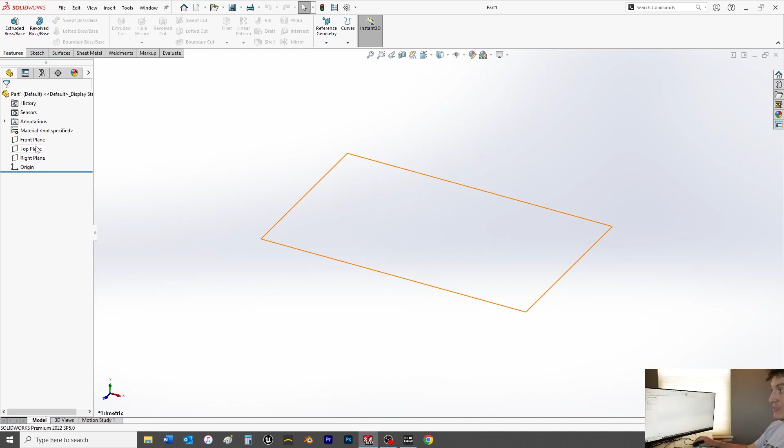So over here on the left side, you'll notice there's front, top, and right plane. Again, pick your poison. I'm going to choose the front plane. I love to make parts on the front plane whenever possible. Again, you will have a personal preference of where you'd like to start, front, top, right. You'll notice that once you make a part, it makes a specific orientation to the part.

However, when you're doing assemblies, it may be important or be driven that you pick a specific plane that you make the 2D sketch for that part. Later in tutorials, you will see where that applies. But for this one, it's your preference. Have fun. I'm going to choose the front plane.

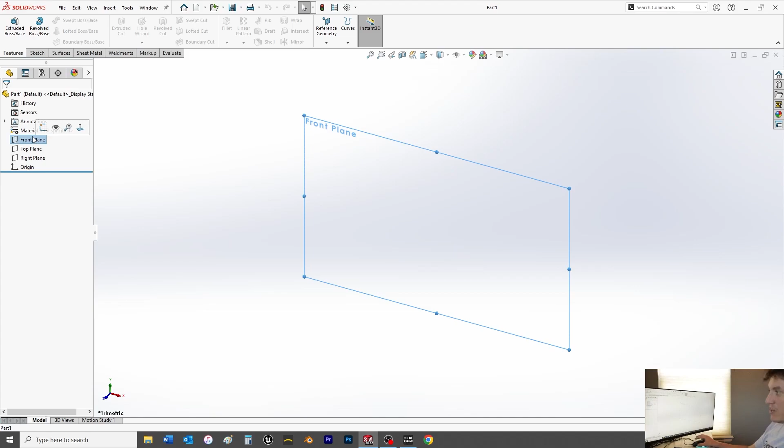I'm going to click the space bar. It opens up this little orientation dialog box. And this awesome little button here, Normal To, is what I'm going to choose. You could also hit Control 8, the hotkey for it. And that's going to bring my front plane Normal To view.

You're going to find Control 8 or Normal To, that hotkey is something you're going to want to work with a lot in many different situations. It's going to simplify things for you. Once things get all wonky and upside down and you've lost your way, hit Control 8 to bring things back to Normal To, and then you can tweak it as you need.

So from here, up here in the top left, we're going to go to the Sketch tab, and then we're going to click Sketch. Now from here, I'm going to choose a center rectangle. You'll notice there's a little drop down arrow to the right, which gives you a couple of different options, but for this tutorial, we're going to stick with a center rectangle.

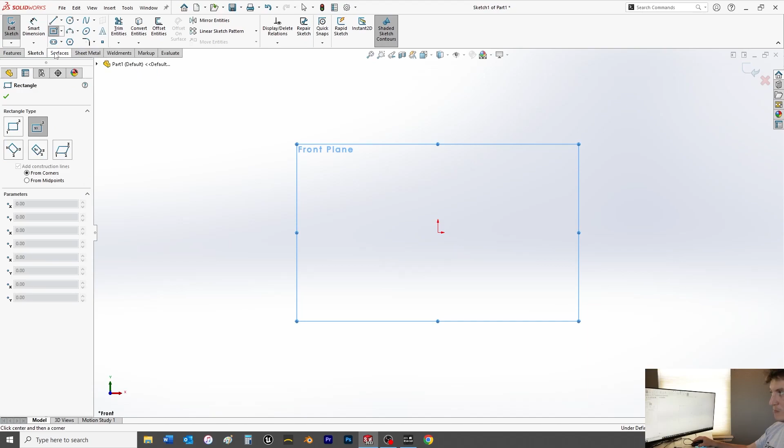Now, oh no, not quite a Bob Ross, but I do have myself a number 2 pencil icon there. I'm sure if you squint real hard, you'll see a number 2 on that pencil somewhere.

Anyways, you will in fact see the icon of that little center rectangle that we chose from up here on this button right below the number 2 pencil. So I'm going to bring my number 2 pencil and point on this point here known as the origin. When hovering over it, I haven't clicked anything yet, you'll also notice this little yellow box popped up, which is a relations icon. Further, the icon within this box is the coincident icon.

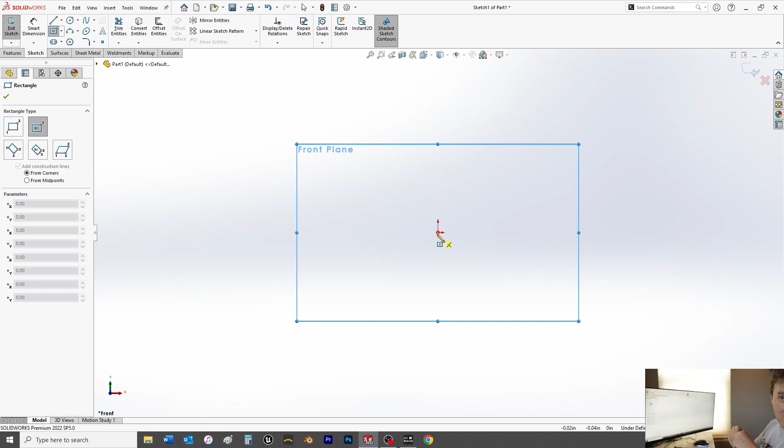I'm definitely going to go over relations in depth more in future tutorials, because relations and dimensions are super important to fully defining a sketch. And I can't think of a reason why you would ever want to leave anything in a sketch undefined, unless you have infinite reference lines, construction lines, which we'll get into in later tutorials, what that even means.

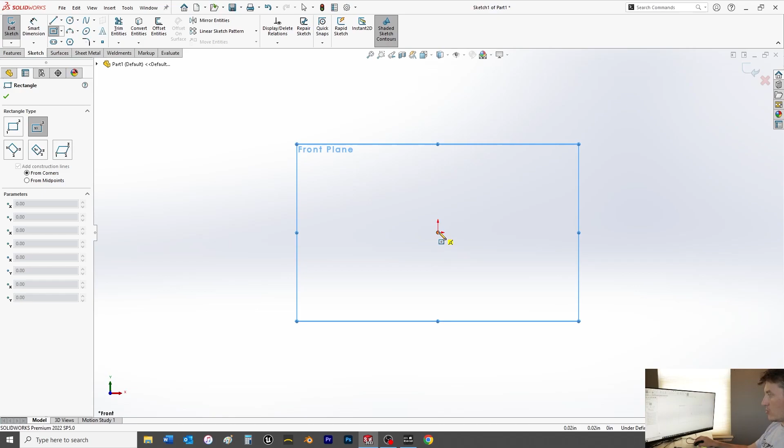But for now, what we're going to do is click. And when I say mouse click or just click, I'm simply referring to a default left click. Otherwise, I will say right click. So we will click on the origin and drag in any direction. And just like that, we have started a rectangle and or square, depending on the shape, you could argue.

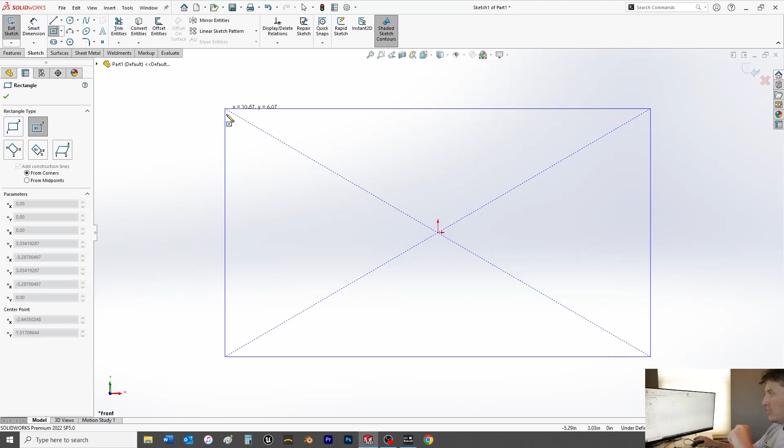Now, it doesn't matter how big you make it right now, because we're going to define it with two dimensions. So I will simply click, and then over here on the left, close the dialog, making sure that the rectangle button up here is no longer selected. I don't want to draw another rectangle. You could draw rectangles all day long if you want to make some funky Picasso, but for this simple painting, we only want to use one rectangle.

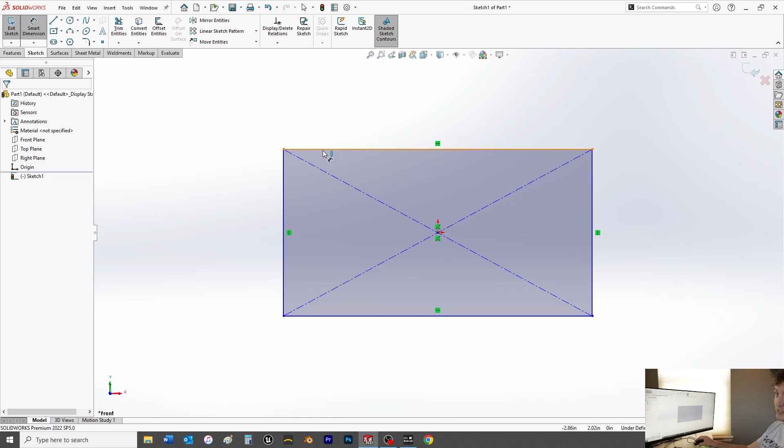So let's continue. The next thing we're going to do is select Smart Dimension. Below that, there's a drop-down arrow for more specific types of dimensioning, but for now, Smart Dimension is adequate. From here, you could dimension any one of these lines, or all of them, but depending on how you do it, 2 lines on this rectangle will fully define it, and any other dimension added will be considered a reference dimension only. So we can only have 2 driving dimensions in this instance without over-defining it.

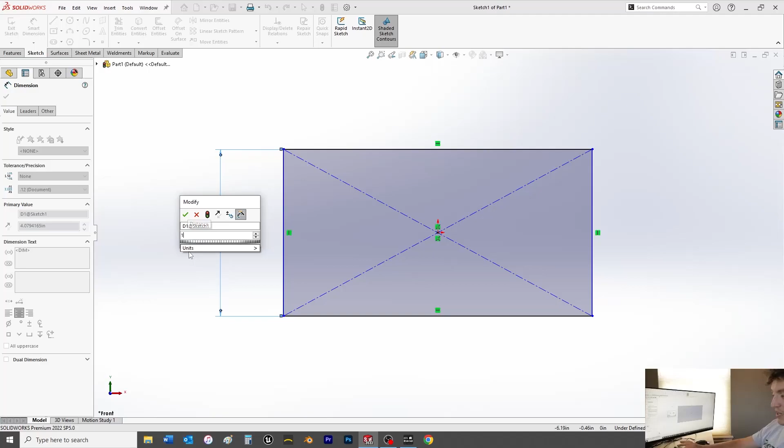I will get into much greater depth later about over-defining, under-defining, conflicts of relations, because that can also be a problem. But for this one, I'm going to keep it simple and choose this vertical line here. It has a random dimension already chosen, but we're not going to accept it, because we want to make a 1 inch by 1 inch by 1 inch cube. So we're going to define 2 of the dimensions within this sketch off of 1 dimension. This is super sweet. Type 1, hit enter.

Now you'll notice something. Before, all of the lines in this sketch were blue, which means underdefined. You'll also notice these green little boxes with icons in them. Those are relations generated by choosing the center rectangle option. For now, we're going to keep it simple. I don't want to use the dimension again. We've defined this vertical line, chose 1 and hit enter, which closed us out of the Smart Dimension command.

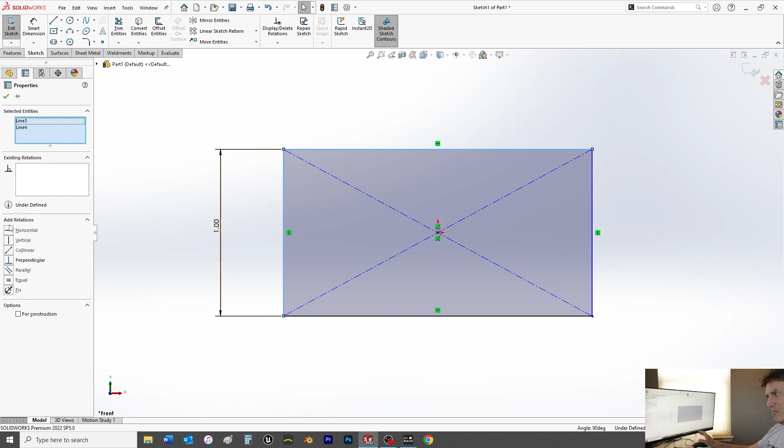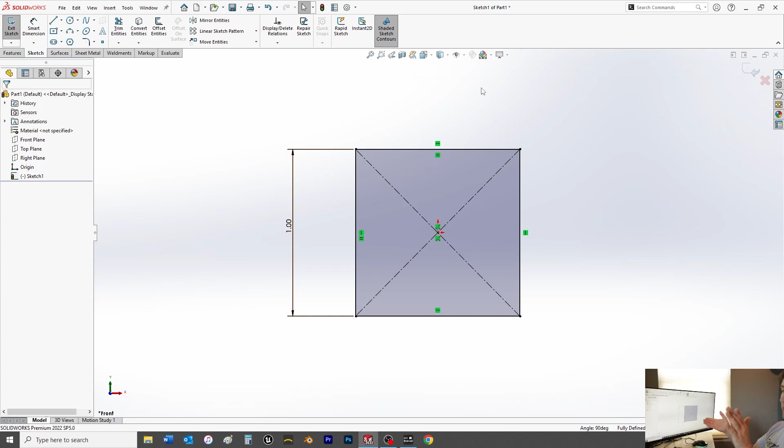Now I'm going to press and hold the Control key, select this vertical line, and then this horizontal line. And voila, over here on the left, we have an Add Relations option with quite a few different things to choose from. Most are logical, but for this instance, we're going to choose equal. And just like that, this horizontal line and vertical line are equal, 1 by 1. As a result, this entire rectangle, which is now a square, is fully defined. Yay! We're almost there.

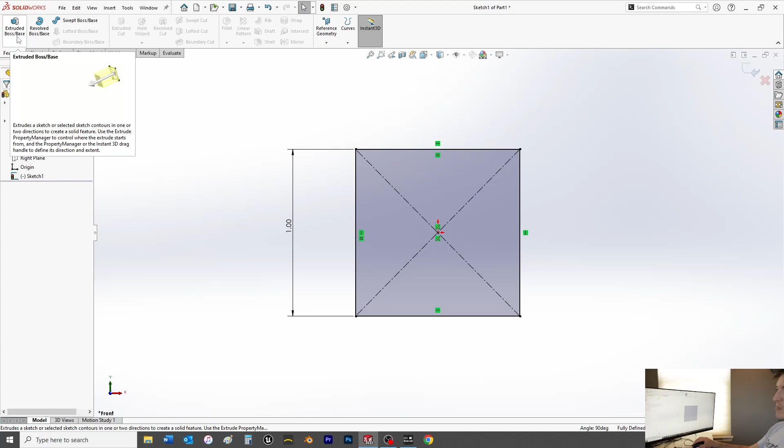Now, you could exit out of the sketch and then go into the Features tab and choose the next command. But I'm going to make it simple and potentially more efficient in this instance. I'm going to go up here to the top left, to the Features tab, and choose the Extruded Boss Base button. We click that, and look at that, a 3rd dimension has appeared. Whoa.

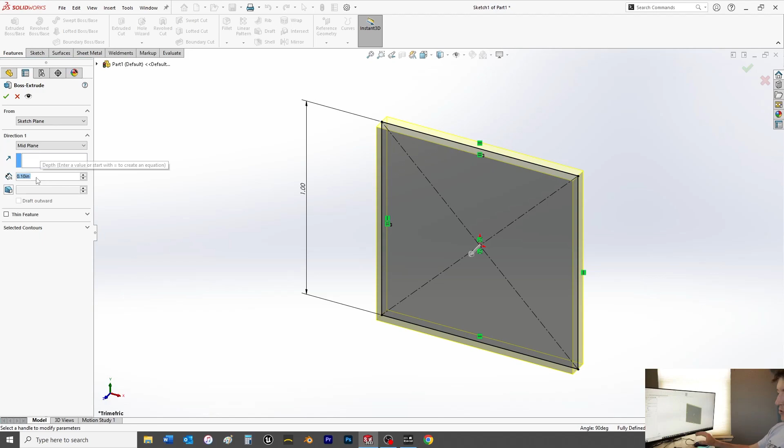Under the boss extrude command, we're going to leave the from sketch plane as the default for now. For direction 1, we're going to change this to midplane to center our extrusion. Then under D1, we're going to choose 1 and hit enter, and then simply hit OK. And just like that, we have a beautiful cube.

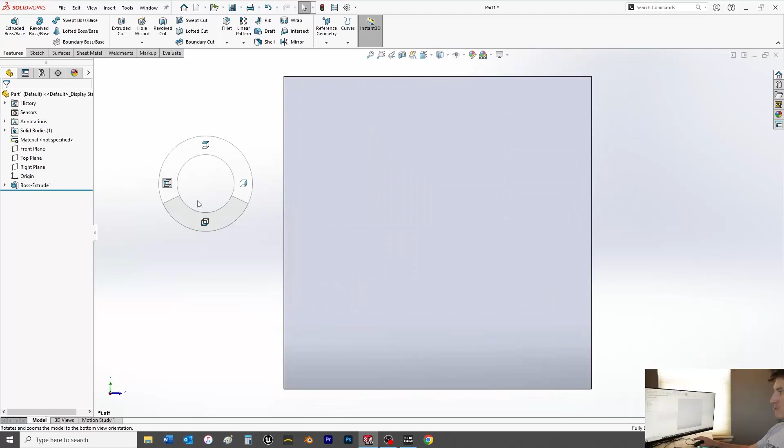If you're wondering how I'm making the cube move, I'm pressing the center scroll wheel down on my mouse, which allows me to manipulate the cube. If I left click and drag, I get the selection. If I right click, you get a wonky gizmo thing. To spin your object around, click your center mouse wheel, or be more precise by pressing your space bar. You can choose front, side, left, right, back, down, up, or an isometric view.

So that is it. Here is your beautiful cube. You've completed a simple tutorial in SOLIDWORKS. Congratulations.